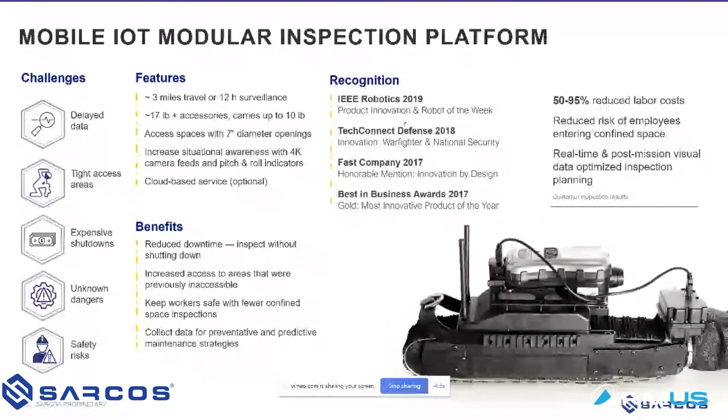The Guardian S, as Fraser talked about, is very lightweight, very portable, and very capable. It's a truly rugged device. It's being used by the DOT, by energy, by chemical companies, and in the green energy sector as Fraser stated. It's really seeing all different types of applications.

To quickly go through the feature-packed device we have here: first, it's portable, lightweight, and rugged. Second, it's wireless, which allows for super short setup time. Typically your setup time to power on and off and get this thing into the area you need it is about 5 minutes or less.

With the battery pack, you get about 3 miles of travel. If you drive this straight for as long as you could, the batteries will allow you to go for 3 miles. Or if you just wanted to use this for surveillance—which we've seen in both the commercial security sector and with the DOT—running just the cameras to absorb as much video footage as possible, you get 12 hours.

In addition to being lightweight, it has a 10-pound horizontal payload capacity, which allows you to carry other third-party devices at your leisure. With the 6 cameras on there, all 4K, plus LED lighting and an infrared camera, you can attach other devices such as extra lighting, a UT device, or a LiDAR device, and so on. You can see that on this Picatinny rail, as well as the attachment board in the back next to these antennas.

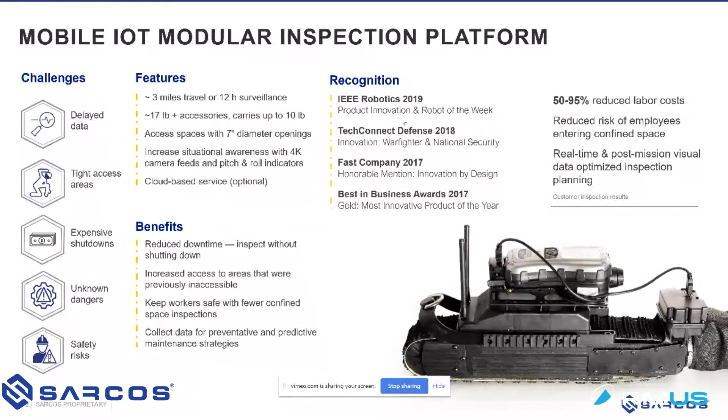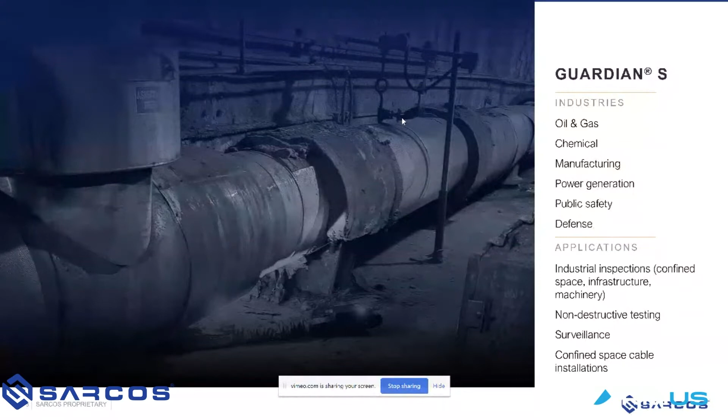Continuing on, as stated, we are using the GS, and customers are using the GS, and our partners like RMUS are using the Guardian S in all different types of areas and industries, from Fortune 500 companies to smaller ones, such as home inspection or individually owned companies.

The main purpose of the Guardian S, as we all know, is to keep people safe, keep them out of dangerous environments, and keep them out of confined spaces. With the Guardian S's flexibility, rigidness, and compact size, you're allowed to really go into areas that are uninspected. We have a phrase: inspect the uninspected. So you can deploy into tight spaces.

You get 4K cameras that have 360 degrees around. So you have 2 cameras in front, 1 camera on the right, 1 on the left, 1 above, and two in the rear — one for seeing directly what's in front of the front part of the snake, and one for seeing what's behind the back part of the snake.

Once you have deployed into this dangerous area where you want to keep the humans out of, it truly is simple to control. You have a tablet-designed controller, or OCU as we call it, and it has all of your displayed features easily readable and ready to adapt to.

So if you want to switch camera angle, you simply select the camera option and change your camera from left to right, center, back, IR, so on and so forth. Or if you want to adjust the lights, it's the same type of deal.

One thing we are really proud of is the ability for the GS to have different modes, which helps the operator perform the task they're trying to perform without too much of a struggle. You have 7 different modes the Guardian S can go into. There's freeform mode for advanced drivers who want to take it into a tight space or rugged terrain and crawl over or around things. Or you have very simplistic driving modes, such as safe climb, to allow you to go up an I-beam while mitigating the risk of not staying on that I-beam.

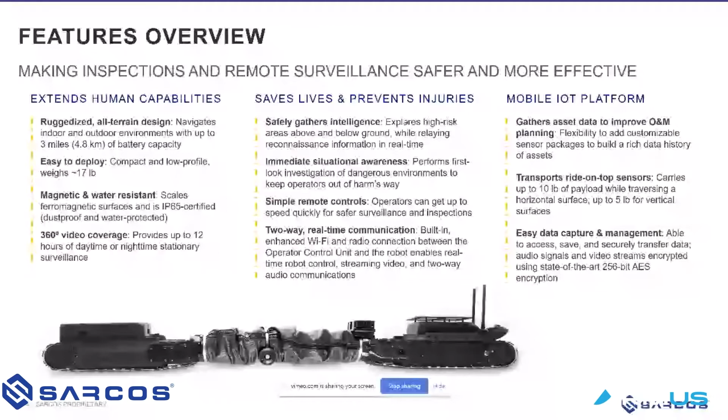Let's see, we have just one. This seems like a Fraser question though, real quick: how far did the snake go into the wind turbine blade? I think you had mentioned this, Fraser, but maybe one more time for the crowd on how deep did that go?

I was going to say, as mentioned, a 6x6 circle is basically what Grant had said. You can get around a 7-inch circle or 7-inch tube that it can travel in. Sorry, I didn't mean to interrupt there, Fraser. Go ahead. No problem.

So I'm not sure if I got into specifics on this, but put it this way: we identified a critical defect about 62 meters into a 66-meter blade. So it's safe to say that no person or other inspection device of any kind can really get that far in. Pretty impressive, I'm just going to say it's pretty impressive.

Considering this, I wanted to clarify, Grant, on your saying — was it inspect the unexpected or inspect the uninspected? Because if we've never inspected this before, like Fraser just said, I would say inspect the uninspected. But it would also be unexpected to actually get down to the end of the blade and see something like this. So, just clarifying, and that was the only question I had, Grant, so you can move on.

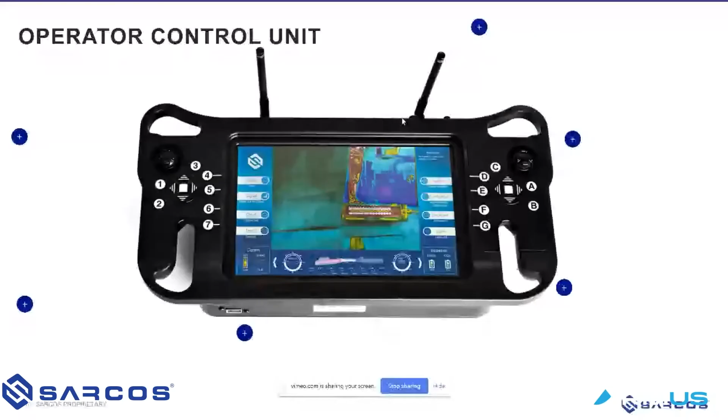I really like that new iteration, inspecting the uninspected to hopefully deter the findings of the unexpected. That is true. It's the flexibility, its capability, its compactness that really allows you to go places you haven't gone before. And while sometimes it's nice to turn a blind eye as long as everything's running, during downtime for inspections we want to get inside those nooks and crannies, and the Guardian S can really help you do that.

But moving forward here, the OCU controller, I think this is a really good picture. It might be on the bulkier side, but that's so it's easy to use, easy to read what's going on with the Guardian S when it's out of sight, and easy to access all the features packed into this wonderful device.

So like we were talking about, the modes you can easily see up on the left. You can change your signal frequency, upload things to your cloud if you have that feature, and so on. But at the bottom of the OCU is where it really gets to what I like to call current technology - this is no longer future dreams, it's actually here. You have a 3D image of the Guardian S at the bottom of the OCU, and it's actually mimicking and showing you what the Guardian S is doing.

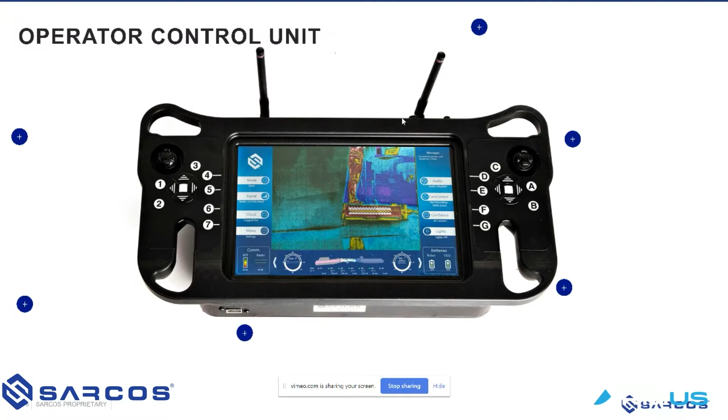So as we were talking about how easy it is to deploy - being 17 pounds and really just the ROV itself and the controller, without having any type of wiring setup or any type of assembly needed other than putting the batteries in, which takes about 4 minutes, I think.

You can easily wear this thing like a backpack from job site to job site, from inspection to inspection. You can fling it over your shoulder, carry the controller in one hand, and off you go from one inspection to the next. It deploys in less than 2 minutes with power up time - you're looking at less than 5 minutes total.

And the user-swappable batteries can provide up to 12 hours of uninterrupted daytime or nighttime surveillance, with 3 miles of travel range. When I'm using the ROV, the Guardian S, in field applications, I find that if you're running it really hard, you get somewhere between 3 and 4 hours of battery life out of it.

And then oftentimes you can simply hot swap one of the batteries to get another good effort out of it. So the batteries are hot swappable if you're just changing one, but if you're changing all of them, be sure to power down with that nice, easy, one-switch power down button.

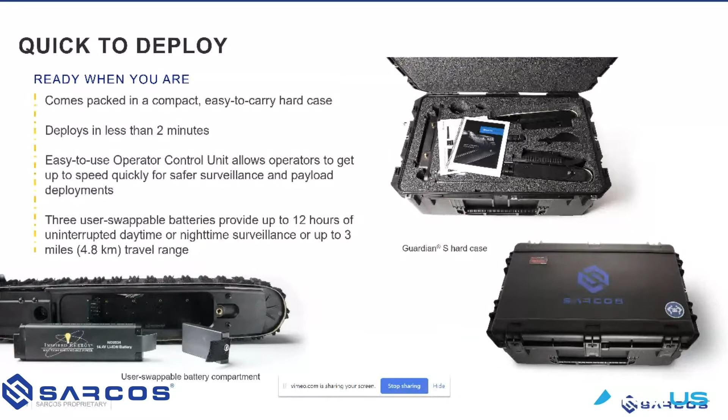And then when it's out of sight, you have your robot avatar shown on the controller, so you know exactly what your ROV, what your Guardian S, is doing when you can't see it.

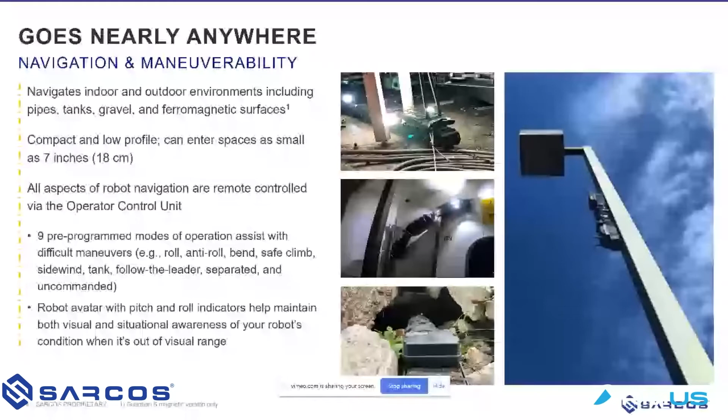As far as visual inspections go, you can record both on the OCU on the controller, and you can also record on the SD card that's on the Guardian S itself. This allows you to do a bunch of different things. On the Guardian S, you have your SD card and your 4K cameras, so you get that high quality resolution inspection video that you might want to edit or shorten or highlight before you send it to your team or customer. You can also record on the OCU for quick time, showing everybody what you saw without having to take the SD card out and download it. So if you're inspecting a tank and there's some rust, or perhaps a foreign object that shouldn't be in there, you can record on your OCU, show everybody that needs to be shown, and then go back out to the field to finish the actual inspection itself. So you really have all types of freedoms and access points when it comes to recording video footage.

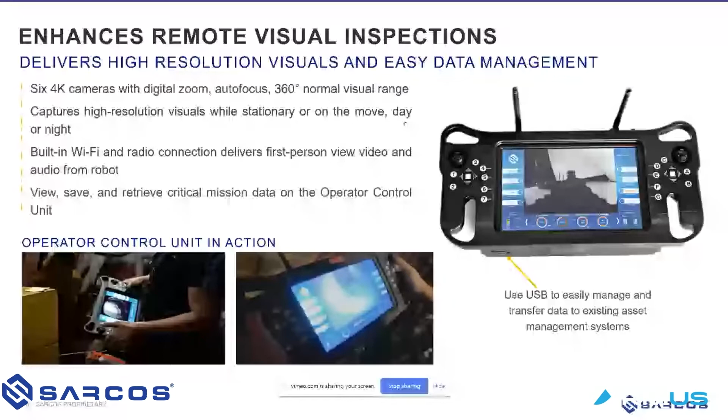When we're sending the Guardian S into confined spaces, up heights, into dangerous areas, we're truly saving lives and preventing injuries. And with that Picatinny rail on the back and your USB port that you can plug things into, much like the SD card, you can really start inspecting, monitoring, and 3D mapping or UT testing your environment as well.

One of the features that came out recently is we've integrated the software from the Honeywell MultiRAE gas sensor into the OCU, which you can see right here on this screen. It'll actually display the gas readings that the gas detector is putting off. It's a 5 or 6 gas sensor, and you can choose which gases are relevant to your needs, and it'll show up on your OCU live feed, which is really, really pretty impressive.

In addition to that, we talked about adding additional LED lighting, which sometimes you need for ultra clear up close visualizations in super dark places or perhaps damp places. We've attached the Leica 3D imaging device to it, and it comes stocked, ready to go out of the box with a FLIR or infrared camera.

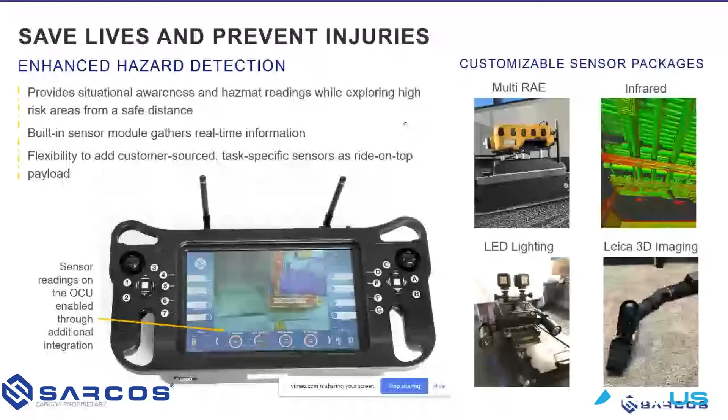Just as far as some questions we have right now, Mike Finn says: you mentioned infrared, is the infrared payload built in? So this I do know - that's the camera on the front end. I'm pretty sure you guys are using a Boson sensor from FLIR. Not a radiometric, but able to do a couple things with it. If I'm not corrected, if I stand corrected, that's as far as the core goes, but I'm pretty sure it's a Boson FLIR sensor in that.

Yeah, that's exactly right, it is built into the front there. No, it's all good, we're working together here. So yeah, no, you nailed it right on the head. It's a high-res FLIR camera built in, so it's ready to go out of the box. It's a simple selection on the camera device on your OCU. So yeah, it's ready to go, it's built in - it's a feature that comes as bought.

The only other question I have that's already populated, and I think you've already answered this one, is can I pull wire with this? This is coming from our viewer, Robotics: can I pull wire with this? Any idea on the weight it can pull? You had already said it can pull 10 pounds, but I haven't done any specific wire pulling with it or seeing how that might work. I can see it dragging 10 pounds behind it, but if you wanted to elaborate maybe a little on that one.

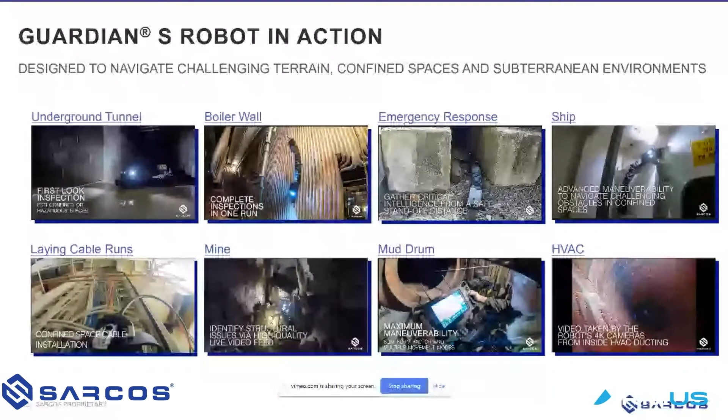Let me turn down the volume though, because this marketing music does get pretty loud. It's a really good visualization of all the things that we've been talking about, and now we can actually view it.

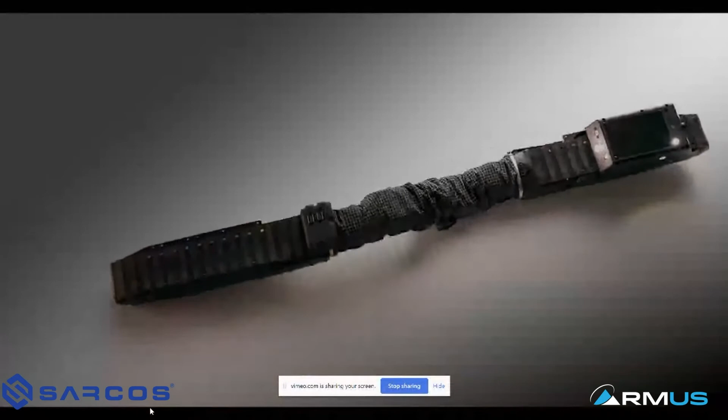All right, well, that kind of shows a bit of the capability in there as far as that goes, Grant.

That kind of shows a bit of the capability in there, Grant. I think my favorite move of all the moves is the Sidewinder, how she kind of slithers to the side. I think that's a really neat way to pilot or move it, in the Sidewinder mode. But go ahead and continue on.

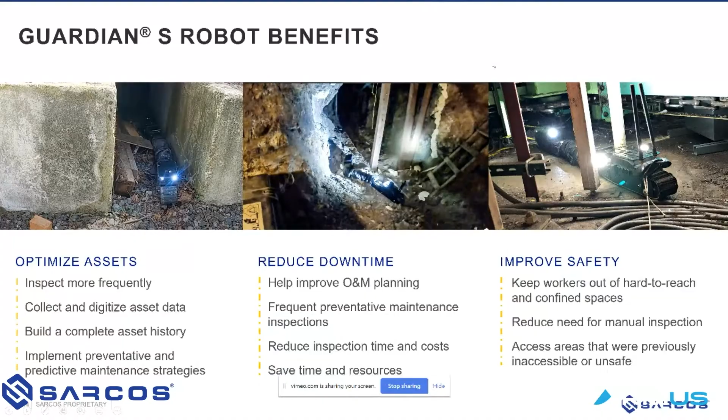Great video there. I think his mic is muted. Oh, is it muted? I think he muted himself. Double check your own muting, because Jace is really good at muting me. I'm live, but he's still sharing screen there. My audio is live, but we don't have Grant's audio. If you can hear me Grant, you can go ahead. It looks like it should be there. Maybe stop sharing there, you're good to go. Screenception going on here. Let's see if we can get him back, and I'll have him check with Jace on his audio stuff. But let's come back to Fraser here real quick.

Some of the interesting things we've been doing out there: we've tried running things into ducting and stuff like that. On this version here, I have a bunch of magnets on the bottom.

Fraser, were you able, as far as putting it into some of the spaces you are, to see it stuck to the side of the wall? We've done this demonstration in the back where I have a big metal door that I've driven up the side of. Have you had a lot of experience using the magnetic portion of this, being that it's kind of a fixed magnet? What's your experience as far as trying to get it to stick to things?

So yeah, we've used that a bit. I didn't use it on the wind farm, although the guys found it pretty cool when I told them that we could drive it all the way up the tower if we wanted to. We've used it for some utility clients at power stations. It works well. It's surprisingly easy to do, even transitioning from a flat surface to a vertical steel wall or door.

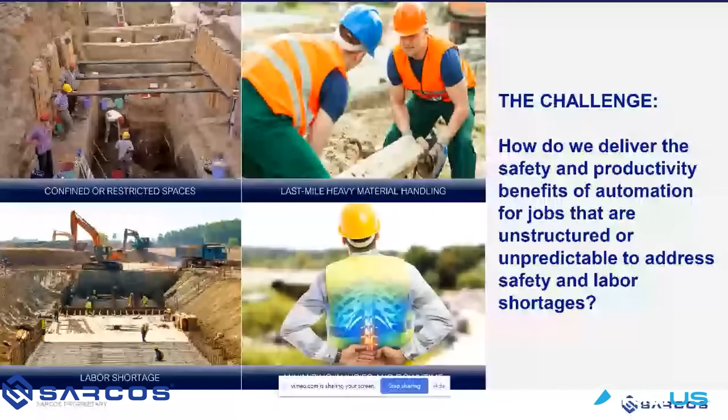Moving on to the XO, GT, and XT. These are upcoming products set for release in 2022, and they're all truly unique. Let's go to full screen mode. As John mentioned, they are not fully autonomous, and that's because Sarcos has a core belief that we truly want to augment humans, so we can continue to do non-automated processes. It's one of those battles where if you're going through the Ford building system and replicating the same car a million times, you can make that perfect weld autonomous. But if you're working at a refinery or a manufacturing facility where every building and every asset is unique, having an autonomous welding device, grinding device, or mover becomes more and more difficult. Now the XO is one of the products a lot of people are excited about because it's actually a true exoskeleton, built to not only enhance the human experience and the aging of our workforce where all the knowledge is at, but also to allow us to do tasks that can't be automated.

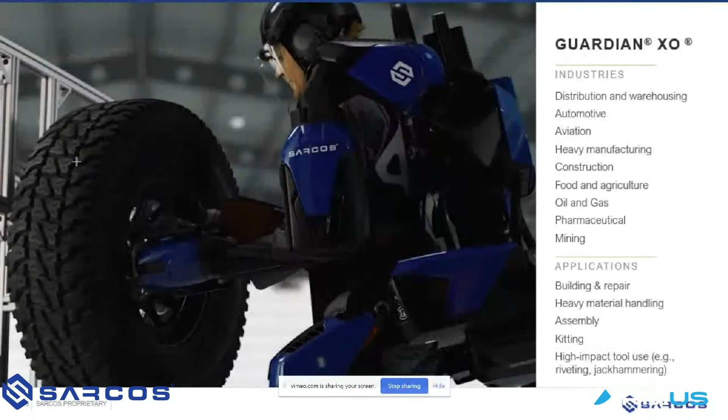So as you can see here, something as simple as lifting a tire and putting it onto a transportation device or onto an airplane or onto any other device that needs a wheel can be pretty humanistic. You have to line up exactly your holes to where the screws are. You have to line up the tire to meet the surrounding parameters of your wheel well, and so on, with different tire sizes, different wheel well ranges, and different overall assets using wheels.

This is a simplistic way of showing why augmenting the human experience can really elevate what we're doing out here with robotics.

So the exoskeleton will help us lift up to 200 pounds. It's battery operated, much like many of our other devices such as the Guardian S, and you can hot swap those batteries to help you get more performance out of a shift.

And then it's also capable of 100% load relief. What we're finding is that we actually want to be somewhere between 90 and 95% load relief, so the operator can still feel what they're handling, carrying, moving, or the tasks they're doing.

So it's truly a life improvement device. We have some market studies, which we had to jump over quickly, showing that the aging of our current workforce at its capacity is not being refilled by new oncoming generations of workers.

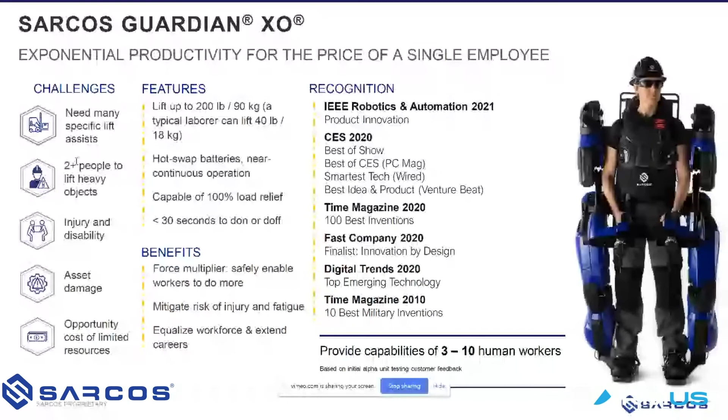So moving on to the XT device. Here's some more pictures of the XO. I know we're running out of time here.

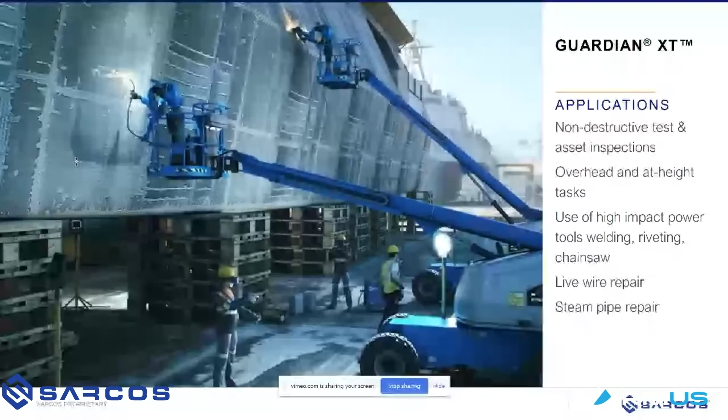So this is the XT device. It's a combination of the XO and GT that John was showing you on screen. John was showing you the GT, we just went over the XO, and this is the XT.

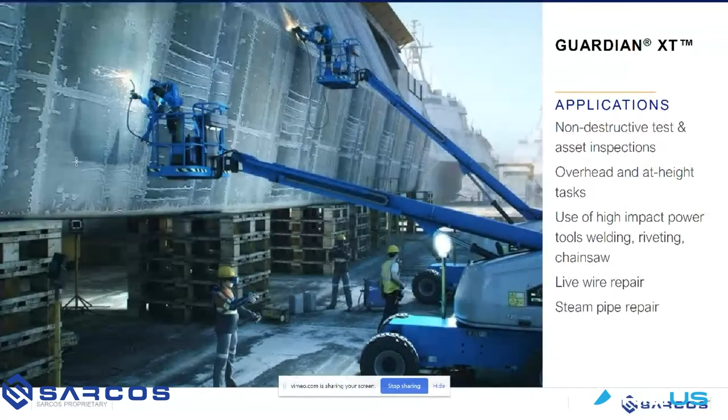This is a very popular topic around Sarcos, our partnerships, and potential end users, because it's a smaller working platform than the GT. You have all the strength of the XO, and with these two combinations, you can do things like work at height, using off-the-shelf tools such as welders, grinders, sanders, UT devices, and so forth.

And it's all being done while keeping the human out of the dangerous environment or out of the lift condition. Some of the peripheral benefits of using a teleoperated device like the XT are you're saving on scaffolding costs, and you're using your skilled technicians who have all the knowledge to do the same task in a safer environment.

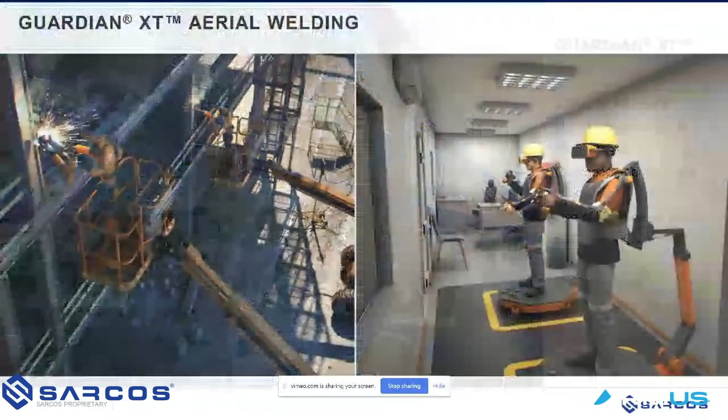So here you can see the operators working safely from a controlled environment and doing truly unique welding, grinding, cutting, and so forth tasks that we need humans to do, because it's an art form, and this is not a replicable building.

It's one of a kind, or there's very few of them, or the tasks we need to do to make an automated process just isn't cost effective. So we really have a lot of freedom with the XT, XO, and GT and their teleoperated capabilities.